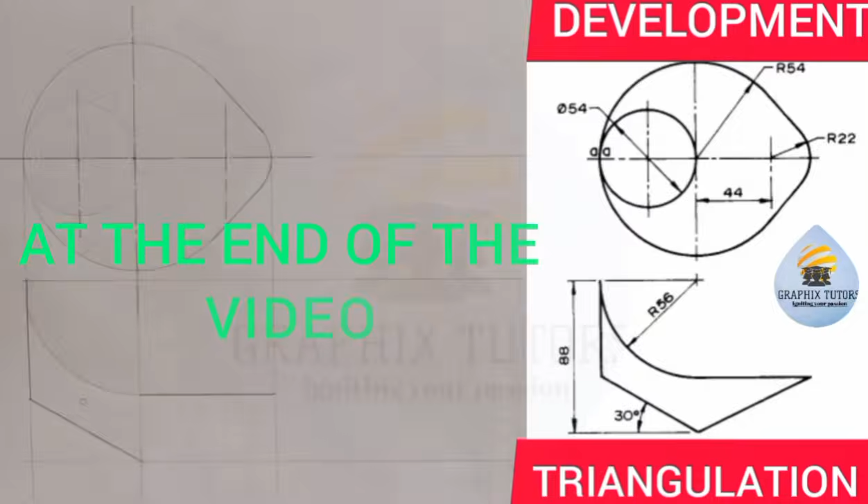Today we want to solve another problem involving triangulation where we are told to develop or construct the full size pattern for the scoop with seam on AA. If you look at the diagram closely, we are told to develop it, to draw the development of this given figure. The first thing you have to do is reproduce the figure in order to be able to develop it.

The first thing I will do is draw my horizontal and vertical line in this manner. I'll draw my horizontal line, a long one this way, just a faint line first, then a vertical one this way, and bring it down this way. This point where they meet is the center of the given figure.

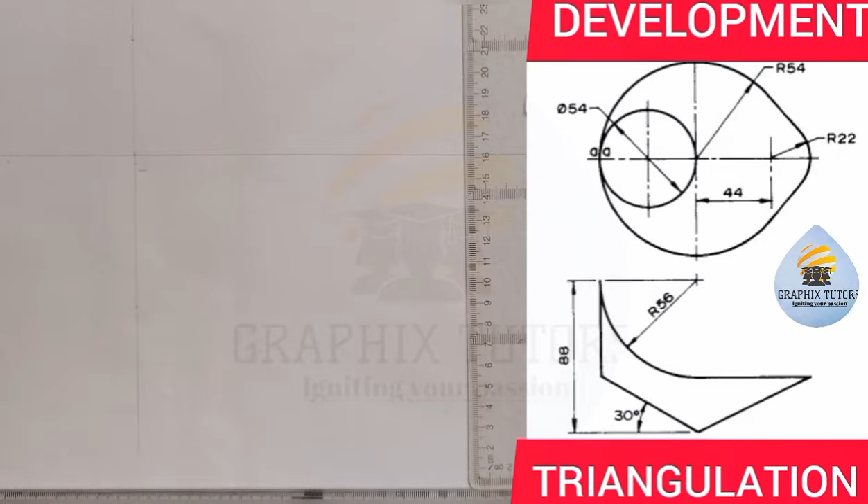Now we are told that this bigger circle here has a radius of 54. So I'm going to measure 54 on my meter rule on that line. This is 54 here, and I'll place it at this point, meaning from this point is 54. Now I'm going to take my compass, place it at this point to this point, which is 54, and draw a circle, a faint line first.

I'll draw a circle, a faint line first. I hope you can see the circle. Let me make it more visible.

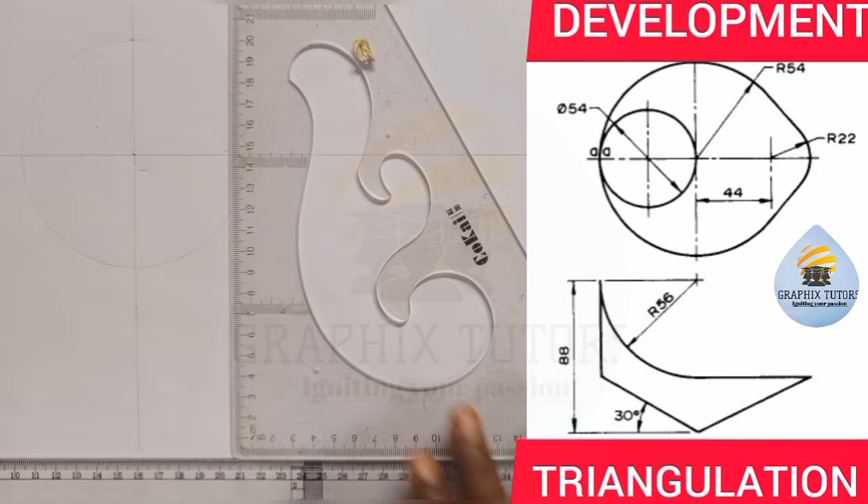Now the next thing I'm going to do is measure another circle away from the center of this figure. From here, I'll measure 44. So if I measure 44 from this point, from 0 to 44, that will be another circle because the circle is not concentric, it is eccentric. That means at this point here, there's another circle. Let me use my faint line first.

It's not taken yet, and we're given the radius of that circle to be 22. I'm going to take my compass and measure 22 here, and place it at this point where they meet, and draw another circle this way. You can see that I've drawn another circle here.

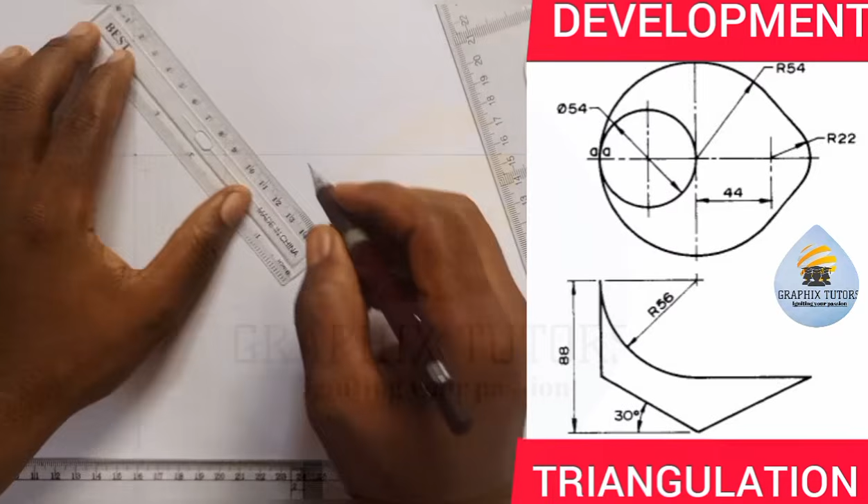Now we're told that these two circles are tangential to each other with a straight line. So I can use my line and measure a tangential line from this circle to the next circle. It should be tangential, from this point to this point. And I'll come here also and do the same thing, from this point to this point, then take it this way. Tangential.

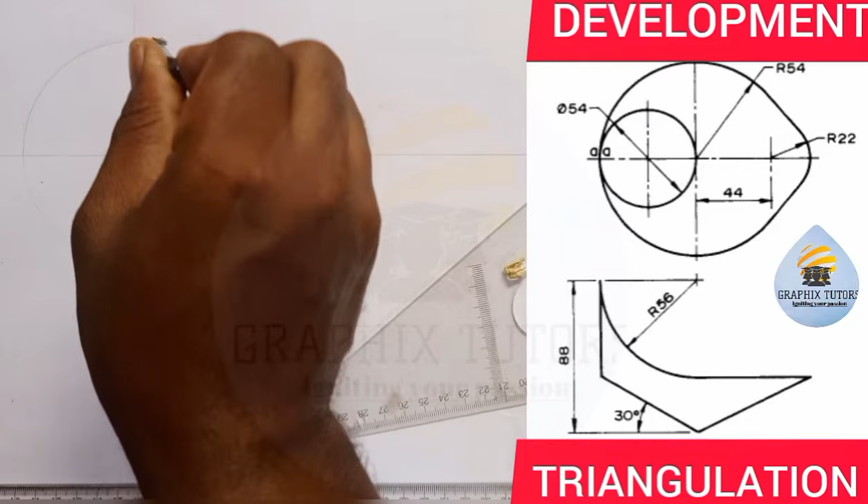Now I can thicken the circles. I will thicken all the circles that I have here in this fashion. So when I place it this way, I'll take it to that point and thicken it. I'll stop here. Then here also. I'll place it at the center point also in order to complete this one.

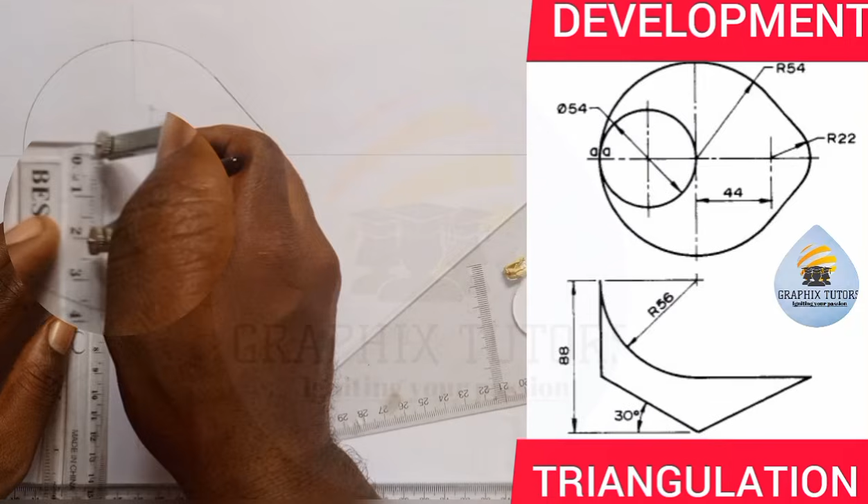Now the next one is there's another circle here that has its own center. The radius is given as half of 54, which is 27. So I'm going to measure 27 here, from 0 to 27. This is 27 here. Then I'll come here and move it to that point, ensuring that it is tangential to the two circles here. You have to ensure that it's tangential.

This is what we have here. So the three circles, they are eccentric. So we use this circle to have this arc.

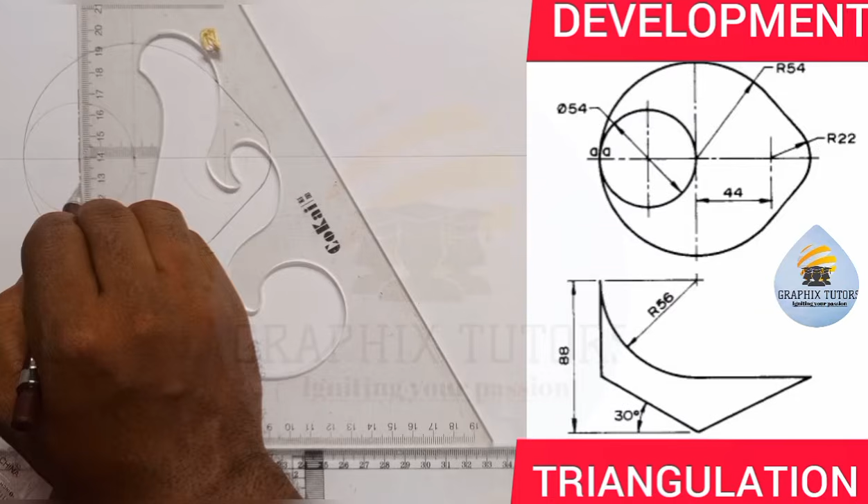So I'll just draw my vertical line here. At this point is the center line here, long, short, long, short, and so on. Towards this line here is another center line, long, short, long, short, and so forth. Then here I can place another center, because this is long, short, long, short, and so on. And at this point another center here, long, short, long, short. So this is the three centers that we have here, eccentric, not concentric.

So now, the next thing we'll do after we've drawn this out, since this is the plan, is to get the elevation. And for me to get the elevation, I will just project this end line here downward.

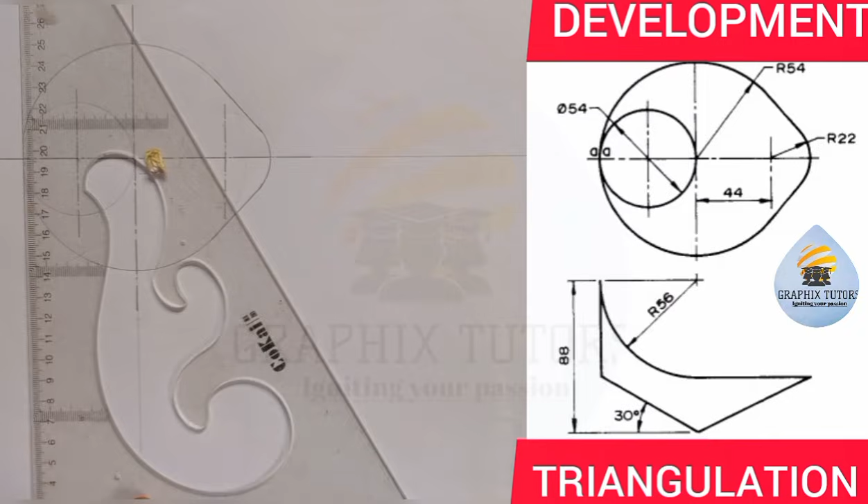I'll project it downward this way. You can see that, and I'll pick a point. Let's say this point here. This should not touch the figure. I'll just project it this way.

Now we're told that from here to the base, which you can see from here to here, is 88. So I'm going to measure 88 from 0 to here, this is 88. And I'm going to draw another horizontal line there, this way.

Now the next thing I'm going to do is, at this center point here that we have, which I have drawn earlier, this center line here, I'm going to draw a line at an angle of 30 degrees. And my set square is on my t square in this manner.

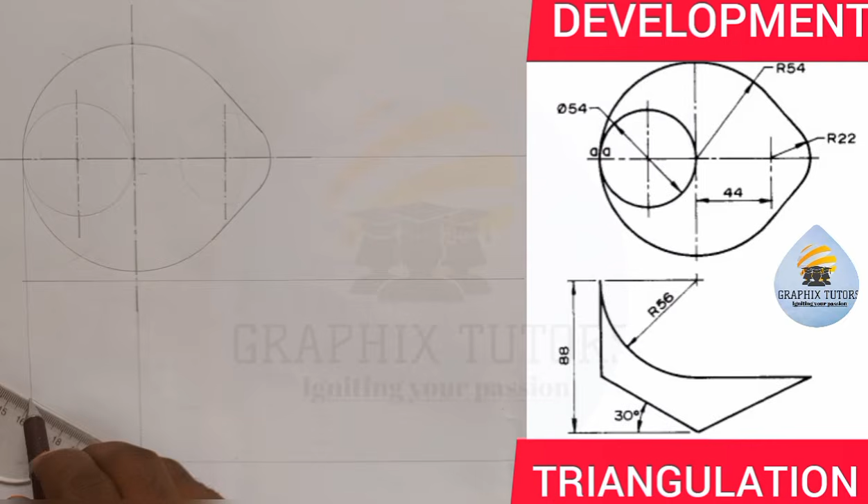Once I move it to this point here, I'm going to draw a line, and that line will get an angle of 30 degrees to touch here. So what I'll do, I'll thicken it, from here to this point. And the other one will be coming up here to touch this.

Now the next thing is, from this point here, I'll measure a radius of 56, as you can see there. From 0 to 56 here. I'll place it at the center point here, and I'll have this, radius of 56.

On this point here. So taking. You can see that, so I'm going to thicken it just this way. I'll move from this point, and I'm going to take a radius of 56.

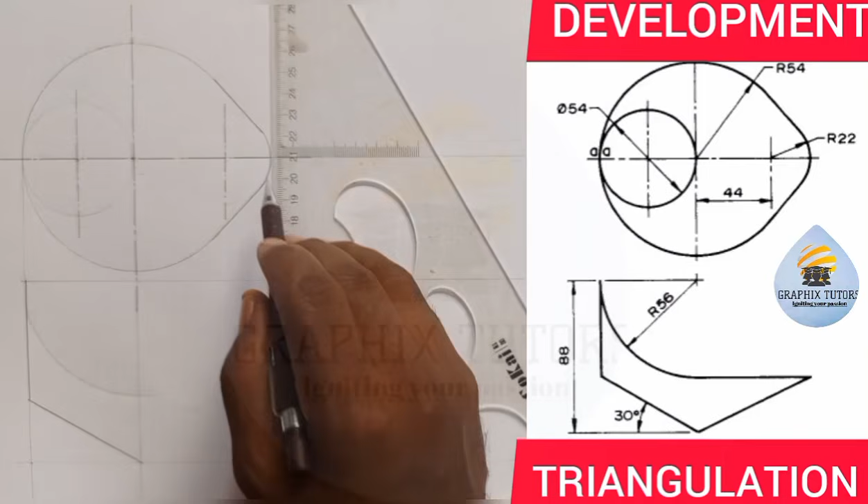And what I'm going to do is, from here to be touching this last point here, I'll draw a line from this point downward this way, and I'm going to draw this to touch that point. So once you've done that, now take this to touch this point here. So this is what we have here.

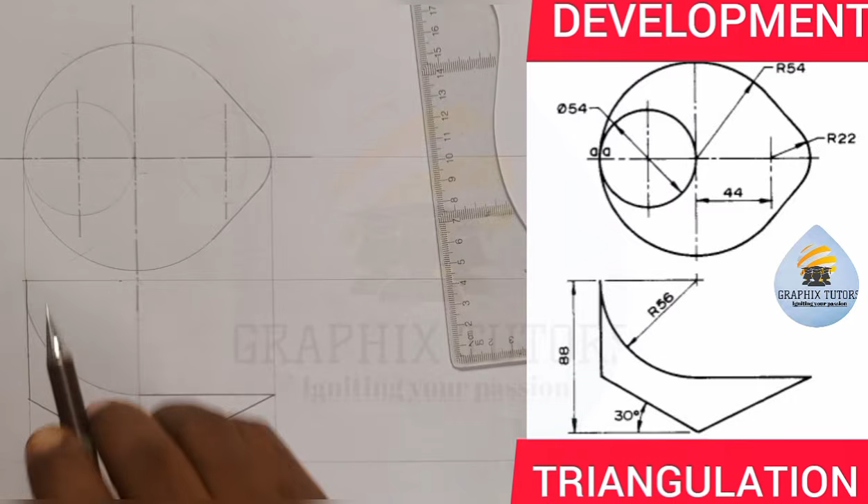Now the next thing is for us to develop this given figure. So before we can develop it, we need to divide, since this is a circle on its own, we divide the circle into 12 equal parts.

First of all, let us start from here. So this is my point A, which I'll give as my point 6. That'll be my point 6 here, at this point. And I'll divide this circle into 12.

How will I do that? Just take your compass, place it here, and mark up this level. Come here also, mark up here. Come at the center point here, mark left and right. So you now take your meter rule. No need of moving the point to reduce the number of lines I will have here.

So from here, I'll mark here. From here, concentrate the center, I'll mark here. I don't want to draw lines to reduce the amount of lines I have there. From here also, I'm going to mark here. So what I'll do is this will now be 0, here will be 1, here will be 1, here will be 2, here will be 2, here will be 3, here will be 3, this is 4, this is 4, this here is 5, and here also is...

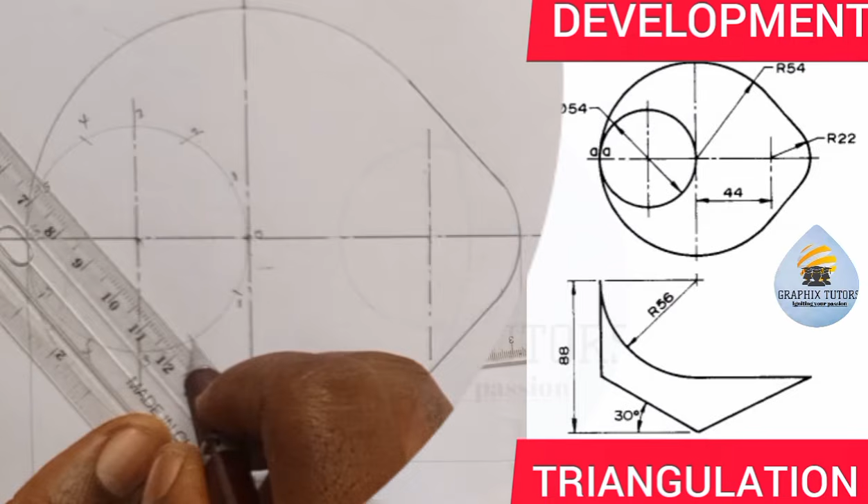Let me do that too. If that is 5, then this point to this point here, here also is 5. So this is what we have here. I've divided that line. You can choose to draw your line if you want to, but it's not necessary. I can just come here and draw my line to come to this point.

Draw the line from here to pass through here to come to this point. Then you do this too, which is not really necessary. So you divide it into 12.

Now the next thing you do is this circle here too, you divide it into 12, but I'll focus on one other side here. I only divide because this is where it starts being tangential from this point here. So I'm going to divide here into 12 too.

So when I take my compass, I'll place it in this manner, and I'm going to mark from here, up and down. I'll come at this top here, I'll mark up. I'll come here also, I'll mark here. Now once I've done that, I'm not going to divide each of this further again.

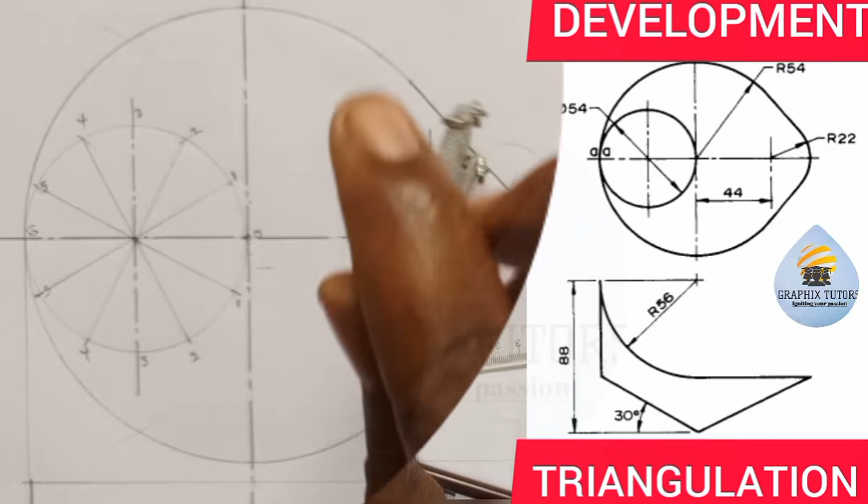So bisect here, come here, and also bisect here. So where they meet, I will now move it to this center point here. From this point, touch here, and from this point, touch here.

I'll come here also, I'll do the same thing. So since I have from here to here, look at the logic. From here to here, same thing as saying from here to here. Similarly, this is what we have here. So I'll come here too.

From this point, you can easily bisect it if you want to. Here, that is here, come here also, you bisect here. So where they meet, in that center, I can just take it here. So I can call this center point to be P, and here to be N, and here to be M.

So again, similarly, here will be what? N, and here will be what? M. So this is what we have here. So I'm only focusing on this three here. So that is what we have here.

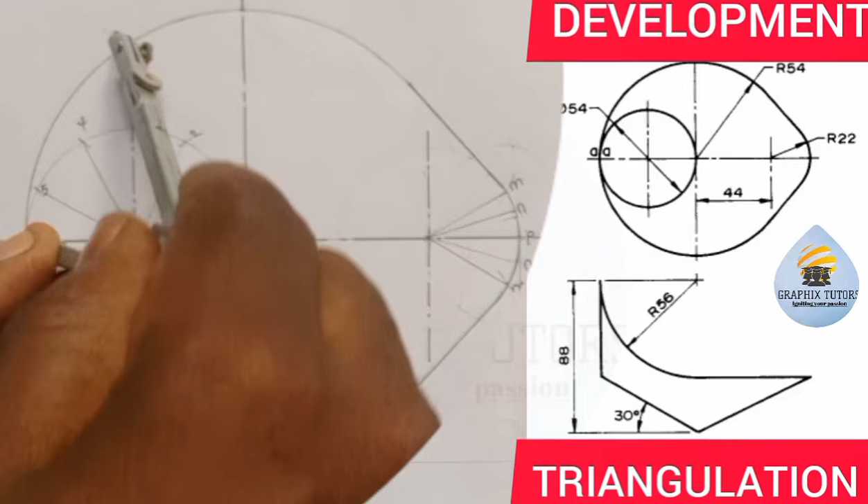So if I take my compass and I place it from this center point to this point here, you can see that. I will come here, I'll cut up. I'll come here, I'll cut left and right. Then I'll come here, I'll cut here.

So what you do is you just pick the two points here and you bisect it in this manner. From here to here, so I'll strike an arc. I'll place it here also, I'll strike another arc. So where it meets, I'll draw a line towards the center, but I will not draw the line to avoid too much of lines on my diagram here. So I'll just stop here.

So what I'll do is I'll take my compass too. Instead of repeating the same thing, I'll start measuring them. So from here to here, it's the same thing as saying here to here. Same thing as saying from here to here.

So instead of you dividing everything, you can divide all you know here. So here will be my point A, my point B, my point C, point D. Here will be what? Point E.

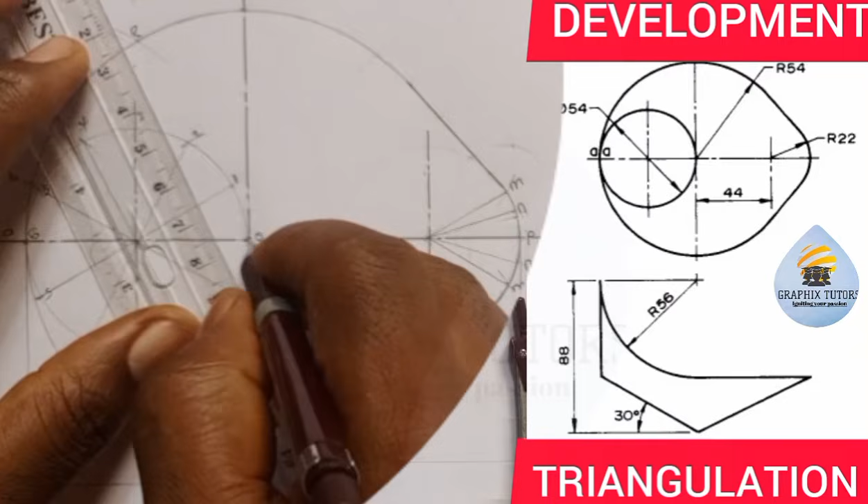You can try to bisect it again, these two points here, to get the center from here to here, to get F. So from this point, this will be my point F.

I can come again from here to here, which is the same thing, this F and B. So to this point here will be G, and we have the next one which is already here. So E, F, G, H.

And after the GH there, or I can put it this way and say, before that I need to bisect here too. Does the same thing, or you don't have to bisect, just transfer the point from this point to the next point here. Or you just bisect, since this point from here to here, I had this, bisecting these two lines here. Let's see.

Let's move it from this point. From here to here, this is G, H, the next one, and the next one. So if this is G, H, here will be what? J, and here will be what? K. All together, G, H, J, and K.

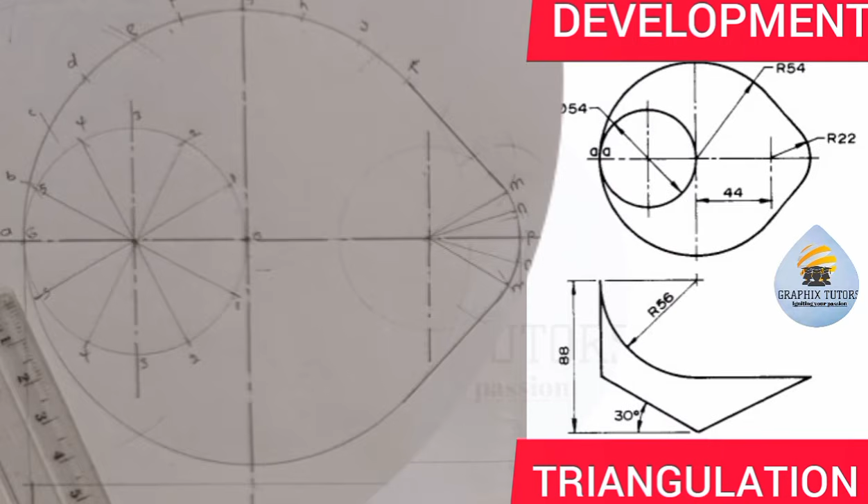So what I have to do here, here is M. So I'll do the same thing because it's symmetrical. Whatever you see at the top will be the same thing at the bottom here. So I'm going to do the same thing here. So I don't have to stress myself, I just have to transfer my points.

So with this, to get the next E from here, this is another E here. Then the F from here, this is another F here. Then this is G here. And we have from here to here, to the center of the circle, to the center we have H here.

We have our J again here, this is J here. And we have what is called K here, this is K here. Are we good?

Then we can continue and just transfer the points continuously from here to here, this point to this point. Same thing as saying this point to this point, then here to here. We already have this here. Or better still, from A to B, to give us to this point here. So this point here, seen here, is also B.

That again, then we continue. The next point we have C here. Then this is D, this is E, F, G, H, and what? J.

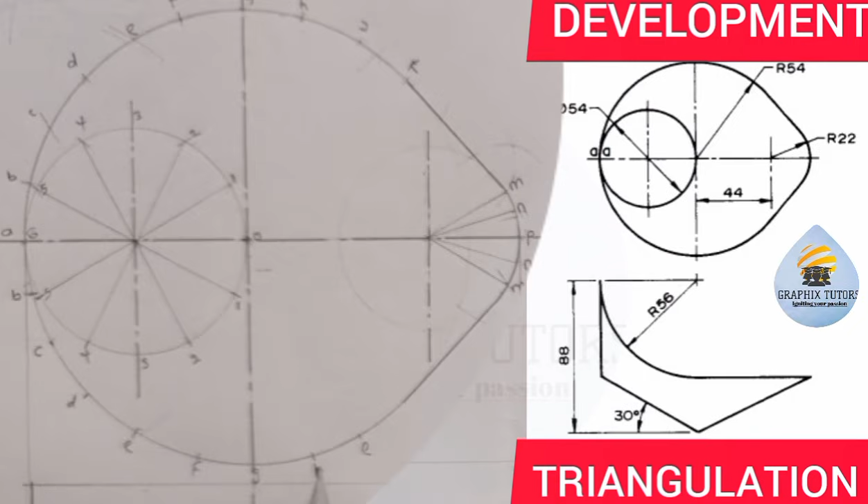This is G we have here. That's the J, then we have the K. You can even transfer the point through this manner. This is K here, right? I can just come here. This is what? This is K also. Right? Can transfer it to this manner too.

This is F to F here. This is E to E. This is D to D. And this is what? C to C, then B to B. You can just transfer the point using your set square.

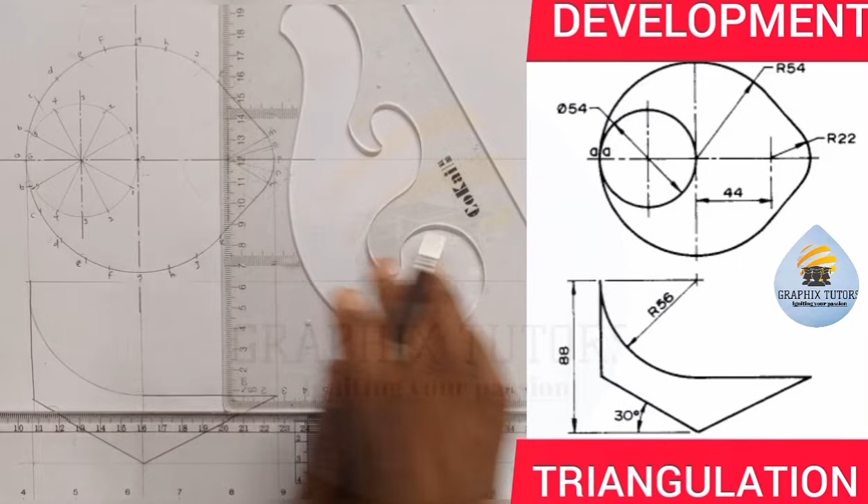That's what we have, right? You see what I did? Instead of wasting your time, you just use your set square, pressing your T square, and you move to K. So K and K on the same point. J and J on the same point. H and H on the same point. G, F, and so on and so forth.

You mark this point. Now what you do next is everything should be rotated to this center here. So I can easily clean all this point out of here. I use this to get M and N, so I should just delete all this off. And this is what I'm doing here.

Now, what I want to do is take everything towards the center of the main circle. So I'll take M to this center here. I'll take N to this center here. P is already there, then N also to this center here. Then this also to the center here. Right? This is what we have there. And we'll continue doing the rest.

Now the king, K, will be holding 1 and 2. K will be holding these two, right? Both up and down, the same thing, because it's symmetrical. K will be holding here to here. 0 and 1, they're symmetrical.

You can see that. So K will be holding 0 and 1 this way. You can see that. Then the next thing here will be J will be holding 1 also. So J will be holding 1. And 1 is holding J, H, and what? 1 is holding K, J, H, and G.

So let's join this way. 1 is holding K, J, H, and G. That is, 1 is connected to those points. You can see that. So 1 is holding K, J, H, and what? And G, the same thing too.

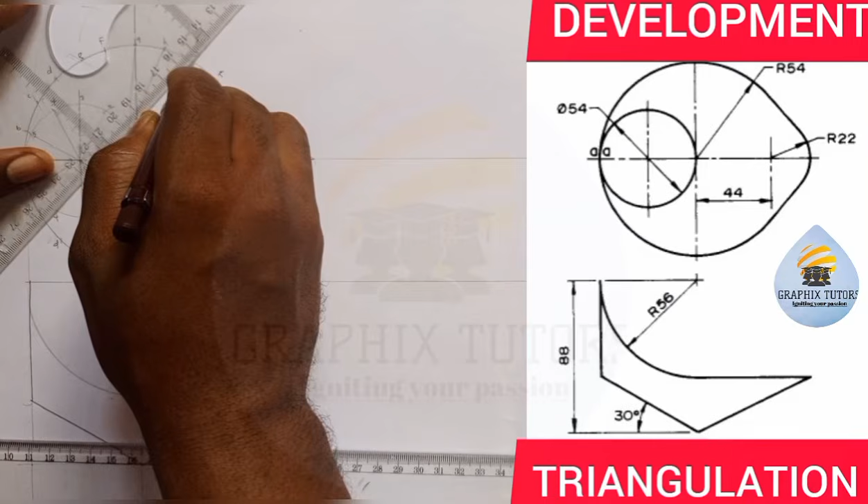This point 1 is holding G, holding H, holding J, and holding also what? K. Just like this, what we have here, right? So from here, point 2 is holding also G and F, G and F.

Then point 3 is holding E and A. Point 3 is holding F, E, and D. That's point 3. So holding F, E, and D. Then point 4 is holding D and C, D and C, right?

Then point 5 is holding C and B. Point 5 is holding this point C and also point B. Then point 6 is holding B and A, right? Point 6 is holding B and A. So you do the same thing that you did up here, right?

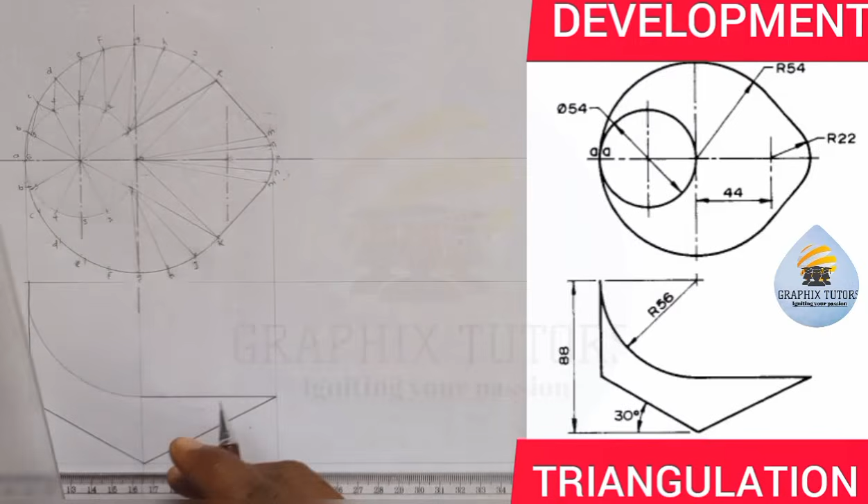So we know that point 2 is holding G and what? And F. Then point 3 is holding E, F, G. Just the same thing you did up there. E, F, and what? D. Then point 4 is holding D and C. D and C. When I mean holding, I mean connecting.

Right? Then point 5 is holding, is connected to what? C and B. C and B. So 6 is just B.

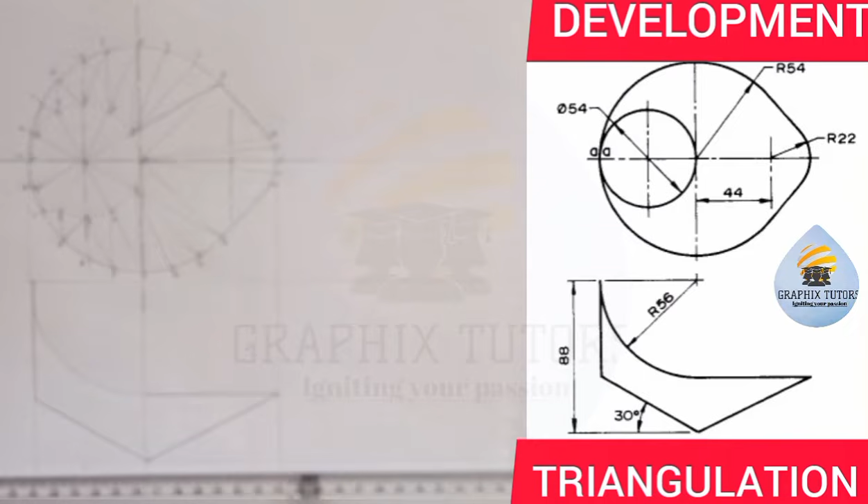So this is what we have here. Is that okay? So all these points, I will move them straight down to touch what we have here. So move all these points here from P, this point P here, then N, so this is N coming down, then M is coming down, then K is coming down, J is coming down, H is coming down.

G is down, F down, E down, D also, C here, B here, then we have the A here, right? This is what we have here, so I'll just write it this way: A, point B, C, D, E, F, G, H, J, K, M, N, then P.

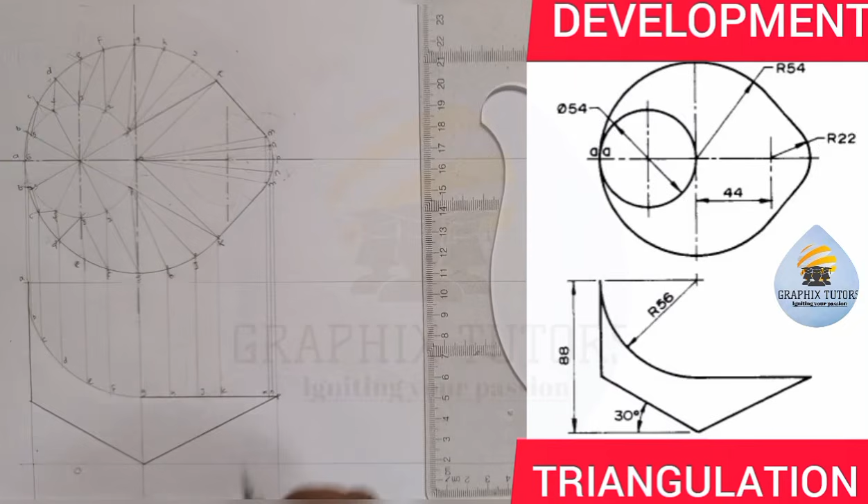Is that okay? So this is what we have. I'll just join everything together. So we're going to join everything together. How am I doing that?

From this point here, this point 0, so here will be 0. From the inner point here, here is 1, right? So I'll just say point 1.

I don't want the lines to be too much. This is how I got my 1. The next one is 2. This is how I got my 2.

Then to 3, this is point 3. I'm tracing the line. Then to 4, this is point 4. Then to 5, right? This is point 5. And we have 6. So here is 0, 1, 2, 3, 4, 5, and what? 6. This is all we have.

So what do you notice? Let's start from M. MNP is connected to what? 0. So I'm going to take MNP to 0. So this is point 0 here.

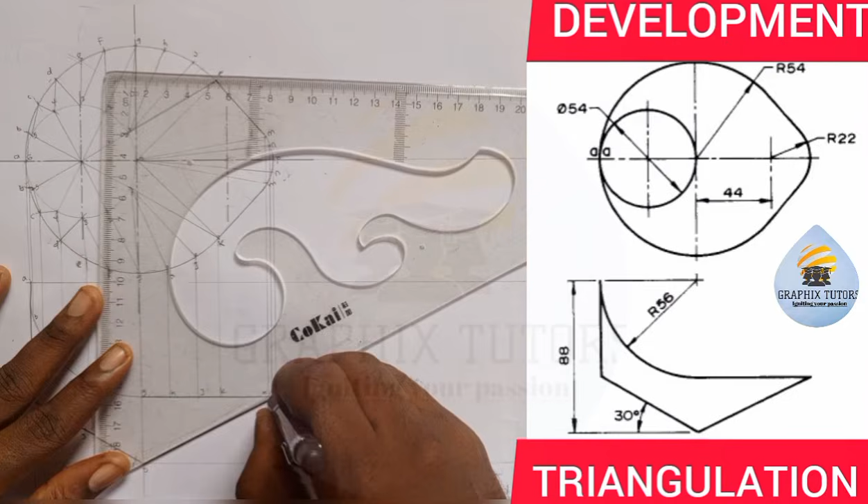Then the next one 2. Then the next one we have K. K is connected to what? To 0 and 1. So K is connected to 0 and 1.

Then 1 is connected to what? 1 is connected to K, J, H, and G. Right? 1 is connected to what? K, J, H, and G.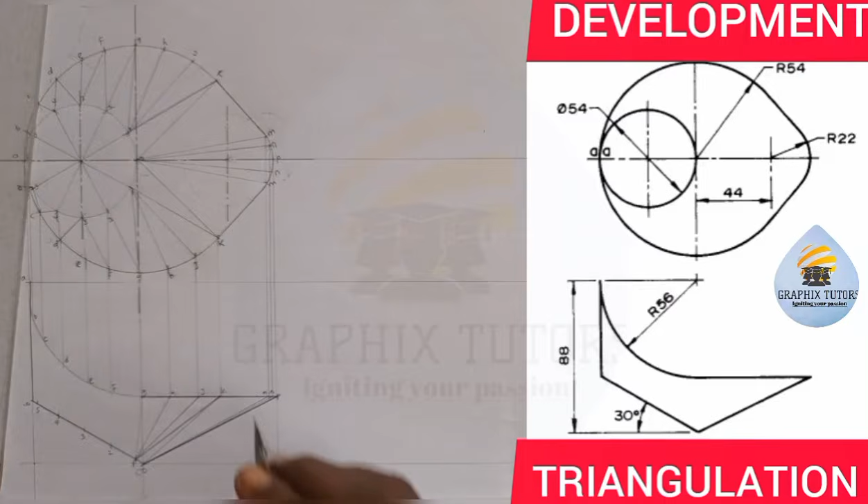Is that again? Then the next one is 2 is connected to G and F. 2 is connected to G and F.

Then 3 is connected to what? F, E, and D. 3 is connected to what? F, E, and what? And D.

Then 4 is connected to D and C. 4 is connected to D and what? And C. Then 5 connected to B and C. 5 is connected to what? B and C.

Right? Then we know 6 connected to what? Just B and A. So this 6 can be at the point of B and A. This is what we have here.

Is that taken? Then the next thing we ought to be doing here is I'll draw a vertical line, because all these lines are inclined, they are at an angle, they are not straight. So to get the true length of these lines here, we get them from the elevation. So to get this true length, I'm going to draw my vertical line this way.

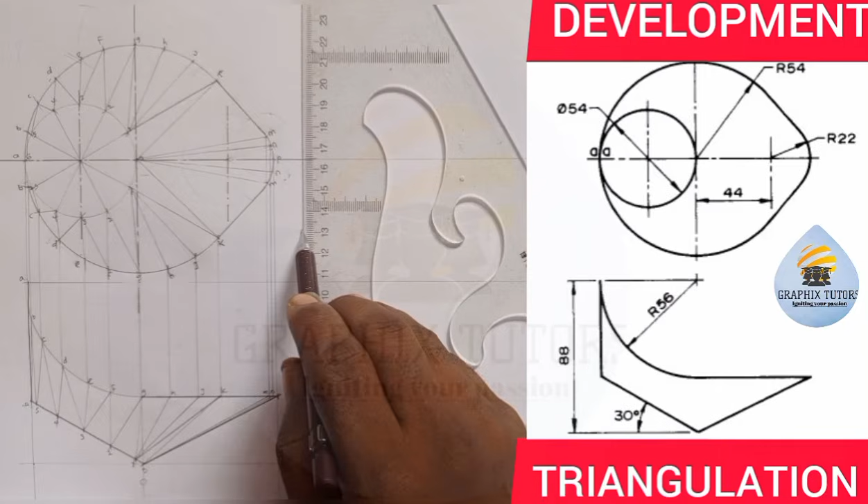Right? So this is my reference point. I'll just put reference point R at this point here. Is that taken? So what I'm going to do is, you see the way I'll start with it now. So this is reference point R. I'm getting my true length there.

Are you ready? So we're going to start from this point here. Don't forget that the line is symmetrical when I divide but horizontally when I cut here. What is at the top is equals to what is at the bottom here in terms of the plan here. So we'll start. Start again.

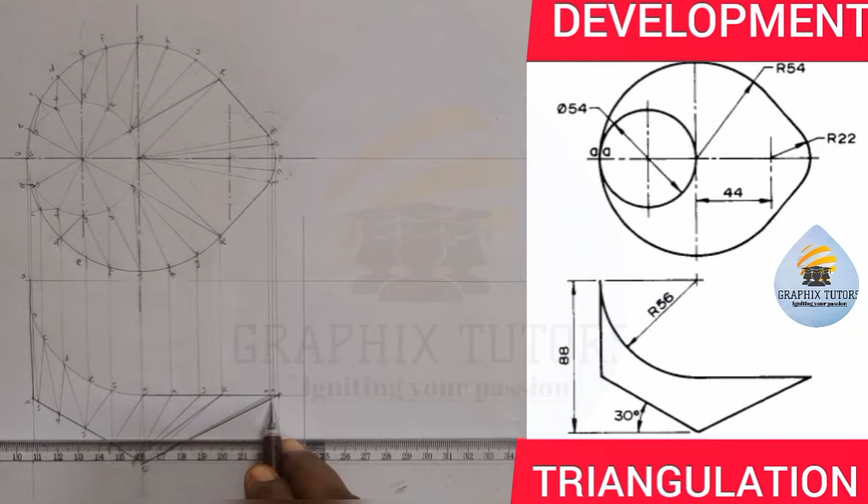So we are going to start. I'm going to generate every point I have here. Right? Point P, you see this line you see here? We know that G, H, J, K, M, N, P, they are on the same line here. They're the owner of this line. Right? Then this is for F.

For point F. This for E. This for D. This for C. This for B. And this is for A that we have here.

Right? So all the M and F, they're all on the same line, and these are the reference points where I'll take my measurement from. So we'll start. Since we have successfully done this, it's for us to start developing.

Now I'm going to draw a line, a straight line, or pick a point. Which this point I'm picking here should be my point 6. Starting from 6, because at AA here, as in the section diagram, that is where we cut it open to spread it out. So at 6 here, right, that's my point 6, and I want to get my point A.

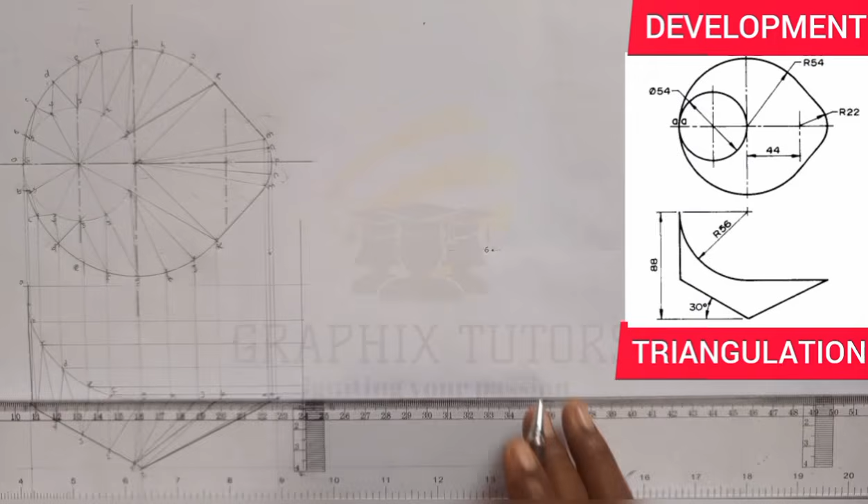We know very well that the true length from 6 to A here, this is where it's starting to become tangential. I will not take it up here, I'll just take it to this point where it starts being tangential here, and I'm going to place it here, right?

So I'm going to strike an arc here, A. Anywhere here, that is where A will fall in, right? That is 6 to A. So how will I get my point A? First of all, I need to get my 6 to B also, because 6 is connected to A and B. So for me to get 6 to B, I'm going to take from 6 to B here.

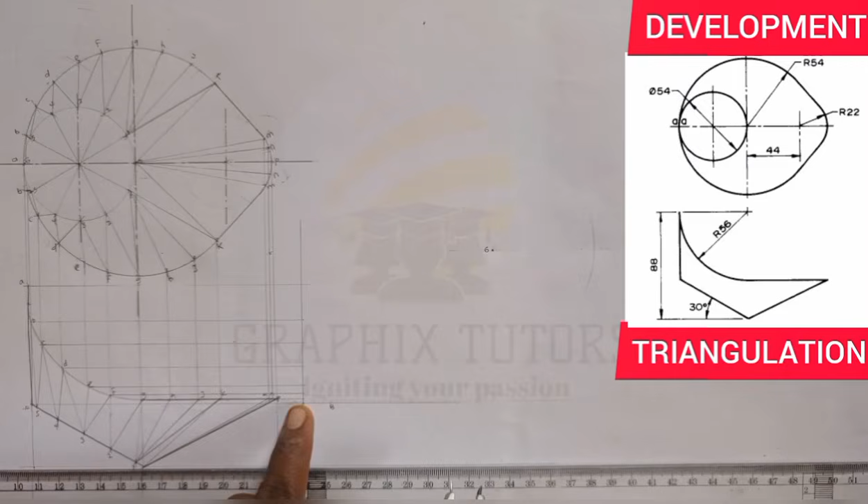You can see that, from 6 to B here. I'll come to this line where I'll extend 6 to this point. From that point, I'll mark my B. So from B to 6, this is B, line of B to 6. I can actually just draw a line here if I want to. Line of B to 6. That's the true length, TL.

True length. I'll just come here and mark from this point here. I'll come to 6, and B will be somewhere around here and here. Now after I've done that, right?

We've not gotten the points A and B. We'll just draw the line of A and the line of B up, and as this is symmetrical, I want to bring them simultaneously, since what is up is the same as what is down. Now the next thing is, how can I get my A now? This is what I'll do.

So don't forget, I can take any given line. This line here is my line A. So at any given distance, at any line, I'll just draw it from 6 to this point here. That'll give me my A.

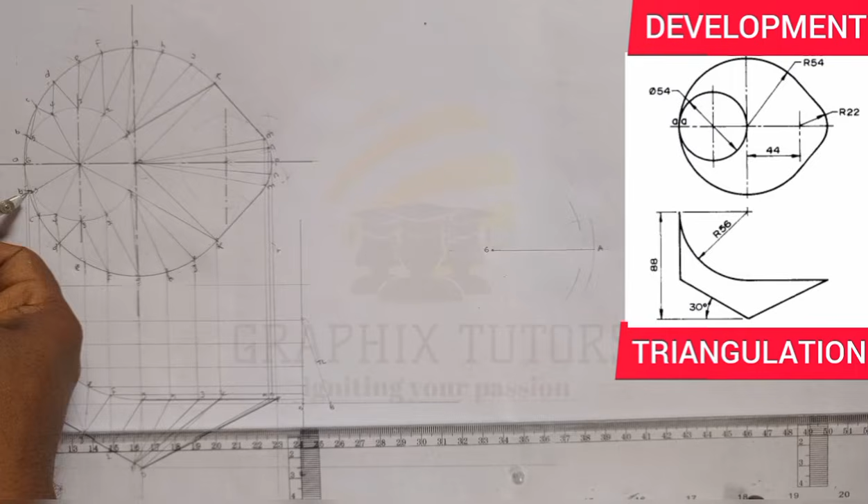Now to get my B, you know that A to B from here, up and down. So I'll come from here, A, I'll strike an arc. This will be B here, and this will be B here.

So this point where it meets here is my point B, and this point where it meets here is also my point B. So I'm going to join those three lines together with my rule. Since 6 is connected to B, 6 is connected to A, and 6 is connected to B also, they are symmetrical, to save our time.

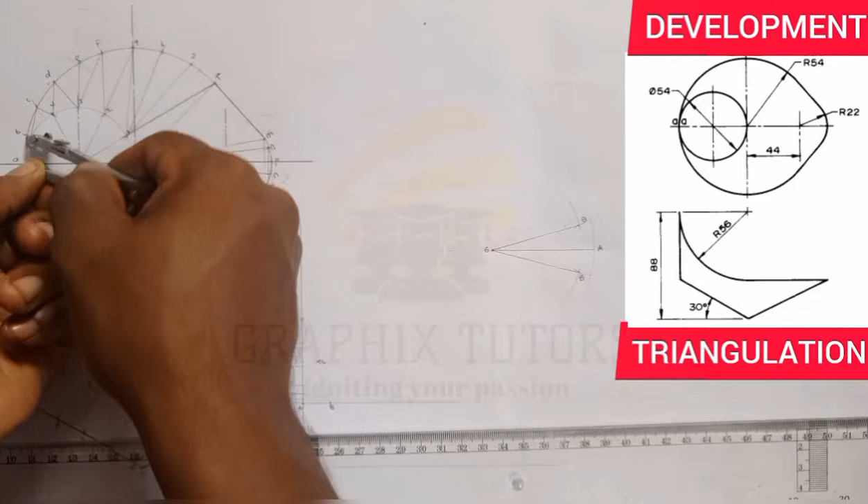Now the next thing is, we've done for 6. 6 is connected to B, and 6 is connected to B and A. The next one will be 5. So I'll come from 6 to 5, and if I place that point at 6, I'll strike an arc here, up and down.

Then from B to 5, B is also connected to 5. So what I will do is go up from here to B, you can see that. So I'll come to the line of 5, and this is the line of 5 here. I'll just draw it out straight, the line of 5.

So this is where the line of 5 is meeting here. I can just extend the line of 5 out. This is the line of 5, the one under here. So we know that from this point to this point is B to 5.

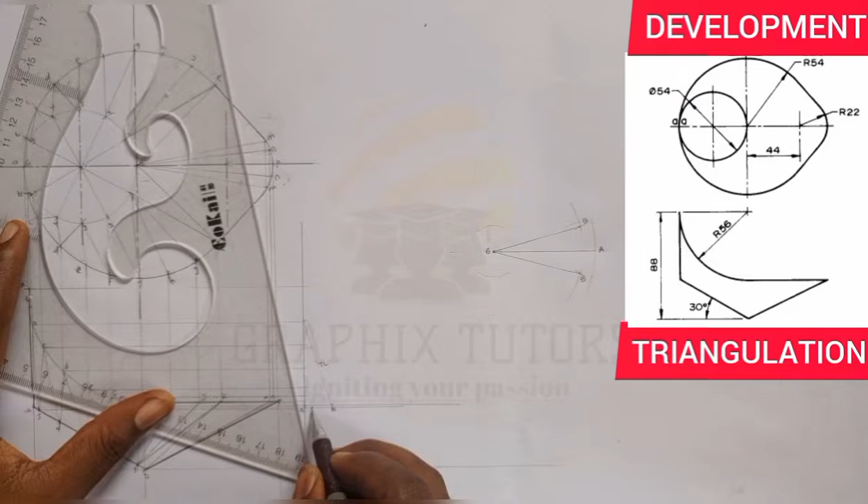That will be the true length. I'll come to the point of B here, or 5 here, and strike an arc this way. So where it meets here, that will be the line of 5. So I'll just draw the true length from this point to the line of 5, to the line of B. From here, I'll take it up if I want to.

So this is for 5. I'll just come here, take the true length from 5, the line of 5, to B. I hope you understand that. Then I'll come to here, from B, I'll strike an arc to cut here, and I'll strike another arc to cut here.

So that point where it cuts up and down will be my point 5. If I come here, B cuts here, I'll come here also, B also cuts here. So here's my point 5, up and down. So go to the next.

5 connected to B in this manner. 5 is connected to B, and also 5 is connected to B here. Now we'll proceed. So the next one is 5 is also connected to point C, right?

5 connected to point C. What I will do is move from B to C, and strike an arc this way up, and come here also and do the same thing down. And 5 to C. This is 5, 5 to C.

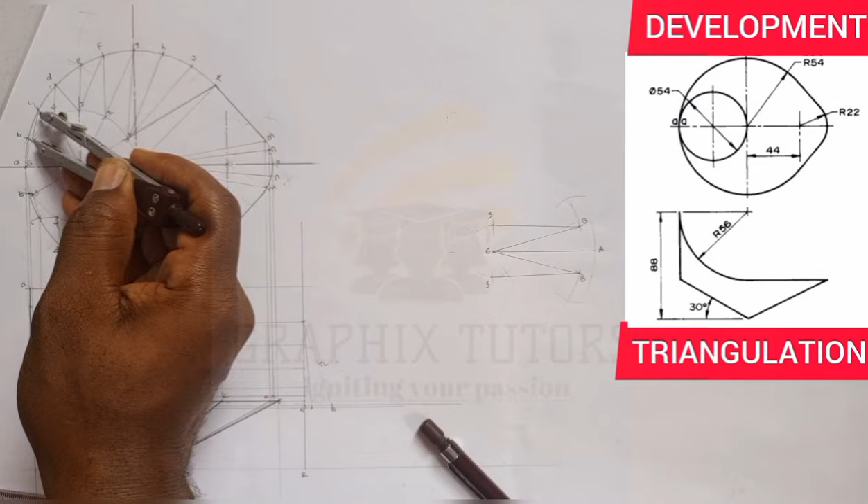I will come on the line of 5 here. I'm going to mark. This line I'm marking here will be for the line of C. So that means from here, this is 5 to C, 5C. So I can just draw a line if I want to, from here to 5 to C, because this is the line of C, and this is the line of 5.

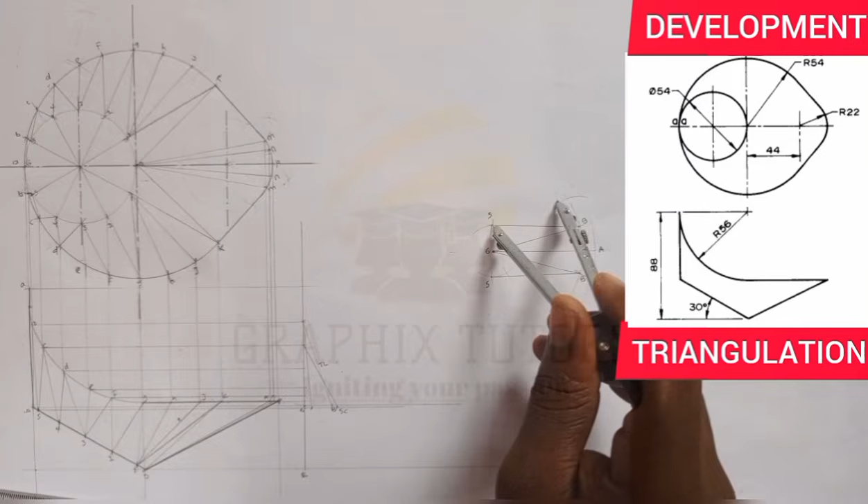So 5 to C, I'll place it at the 5 here. I'm going to strike an arc here, and I'll strike another arc here also.

So this point you're seeing here will be my point C, and here also will be my point C. Let me remove this to avoid distraction. I was using faint lines to join them so you understand what we're actually heading to - this to this, this to this, and to this. I'll connect them sooner. So this C, 5 to C, 5 to C.

So the next one, if 5 is connected to B and C, right? Then the next one is C connected to point 4. So to get point 4, from 5 to 4, I'll place it at 5 and strike an arc up here, place it at 5, strike an arc here this way. So C to 4, to get point 4 you need C. So from C to 4, this is how it is.

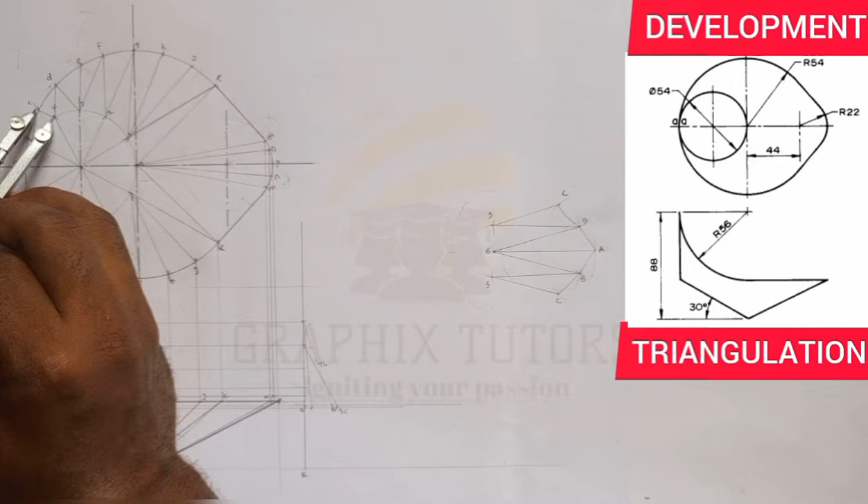Can you see that? Then I'll come to the line of 4. I'm going to use the C to 4 here. I'll draw it out to touch this reference line. You can even extend it out. So I'll take that 4 and mark it. This is C here - this is 4C, C to 4, 4C. So I'll connect it to the point of C.

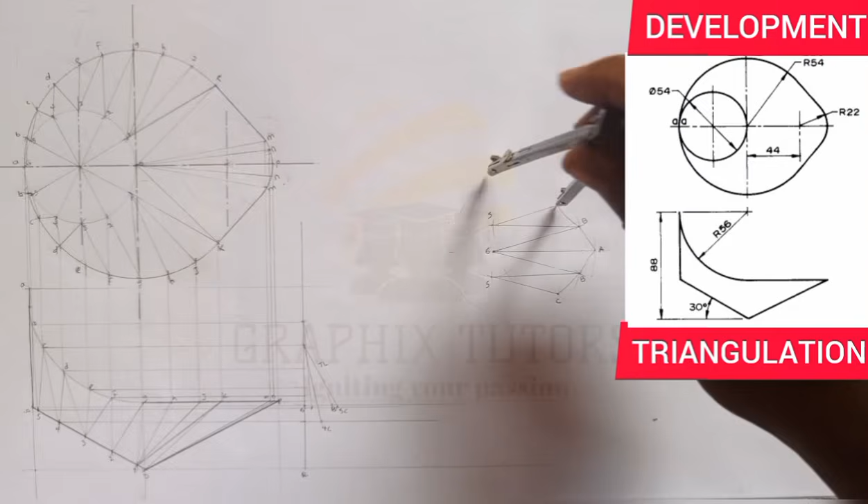So that is the true length. I'll move this from here to the C point here, from here to the C point here. And I'll come from C in order to get my point 4 - I'll strike an arc here. Come to C also to get my point 4, strike another arc here. So this point here is my point 4, and here also is another point 4. I'll continue.

The next one is connecting them that way. C to 4, C to 4. Now we'll move forward. Now the same 4 is connected to D, right? The same 4 is connected to D. So we'll move from C to D.

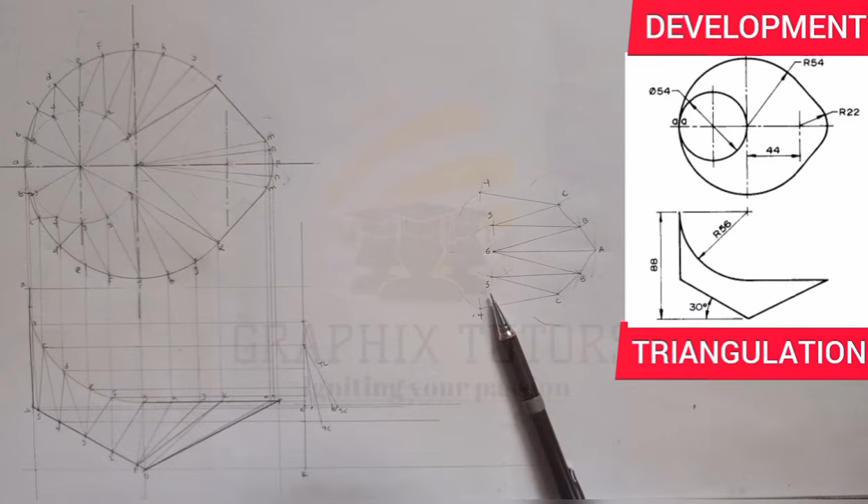C to D, the C to D, any of them you want to use. I'll place it at C and strike an arc up and down. So D is somewhere around this point you're seeing. So 4 to D - this is 4 to D, right? Any of them you're taking. 4 to D. So I'll go to the line of 4, place it on that mark and I'll cut. So this line here is my 4D.

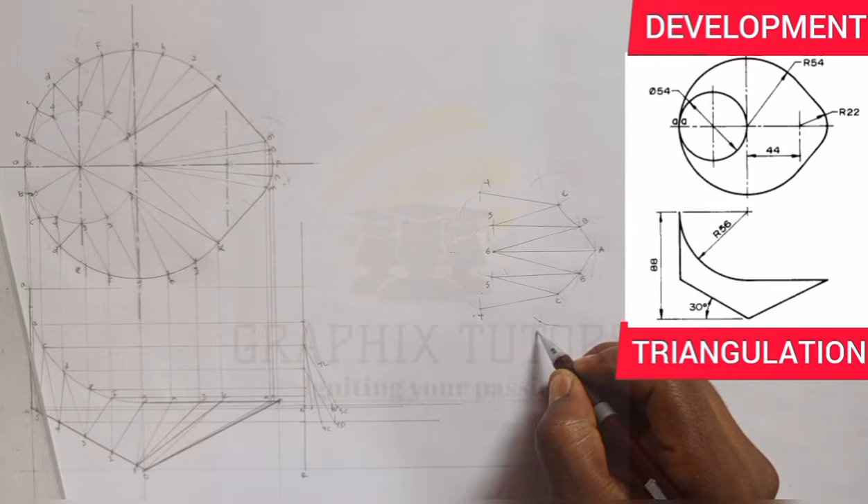So this is D here. I can just join it, 4 to D, from 4 to D. You don't have to really draw these lines, but I'm just showing you. So 4 to D - this is the line of D, then to 4. Can you see that? And I'll come to this point here, 4 to D, from 4 to get point D, from 4 to get point D. So this point you're seeing here is my point D.

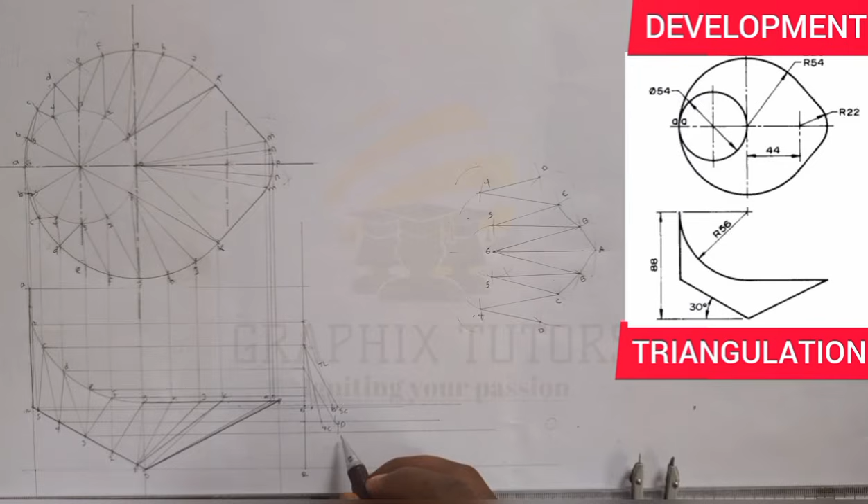D to 3, right? So I'll go to the line of 3 - this is the line of 3. I'll bring it out, straight out. And after I've taken my D to 3, is that again? I'll come to the line of 3, I'm going to mark. So this line you're seeing here will be 3D. I can just draw a line, not really necessary. This is D to 3 here.

So from D to 3, again, I'll come to this D here in order to get 3 here. D here in order to get 3 here. So this line you're seeing here is my point 3, this line you're seeing here is my point 3, right? So I'm going to use 3 to get point E. I'm using the same 3 to get E. So I'm going to come to D to E.

You can see that? And I'll place it here, strike an arc up. I'll come here also, do the same thing here. So I want to get 3E now. So this is from 3 to E.

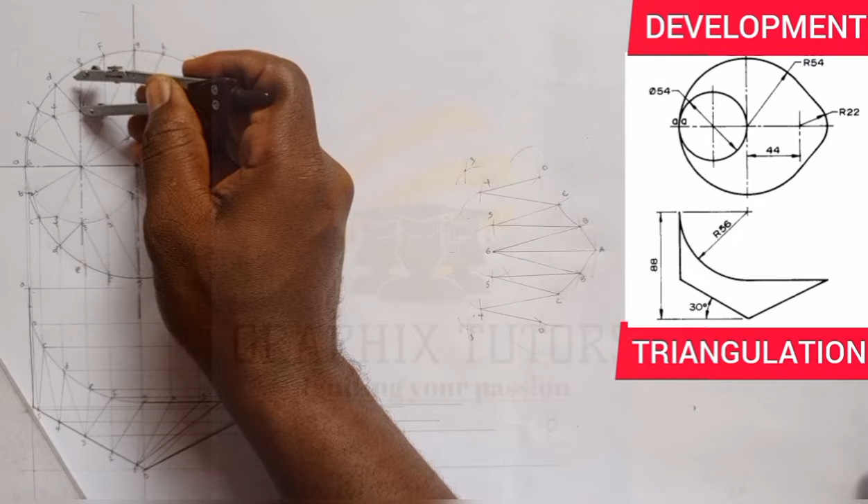I'll come to the line of 3 and strike another arc on that line. This line here is 3E, so I'll draw a line to touch E. This is E, the line of E. 3E. You can see that? So I can take from 3 to E, and I'll come to this point.

I'll strike an arc this way, come to this point, and strike another arc this way. This point here is point E, and this point here is also point E. So 3 to E, 3 to E, and 3 to E.

Don't forget 4 is also connected to D. So we have that, 3 is also connected to D. Right? 3 is connected to D.

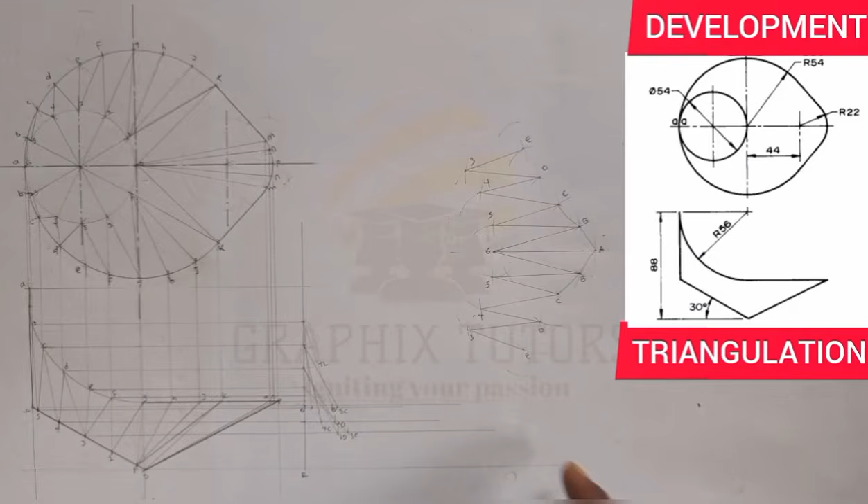Now we'll move forward. The next one is E. We've gotten E at this point, and 3 is also connected to F. So we want to get our point F with point 3, moving from E to F. I'll come from this point E and strike an arc, then come to this point E and strike another arc. For me to get F now, 3 to F.

So I'll come to the line of 3 here, place it on the reference point, and I'll get 3F. From here to the line of F, I can easily connect it and leave it. This is F, so 3 to F here. Is that again? So 3 to F.

Now come from 3, I strike an arc to cut here. I'll come from 3 also and strike another arc to cut here. This point here is my point F, and here also is my point F. So 3 to F is connected together, 3 to F is connected together.

Now the next one is we want to get point G. So F to G, we need point 2. From 3 to 2, because we need 2 to get F, to get G. So 3 to 2, I'll come here and strike an arc, then come here also and strike another arc. So F2, F is connected to 2.

Is that again? So I'll come to the line of 2.

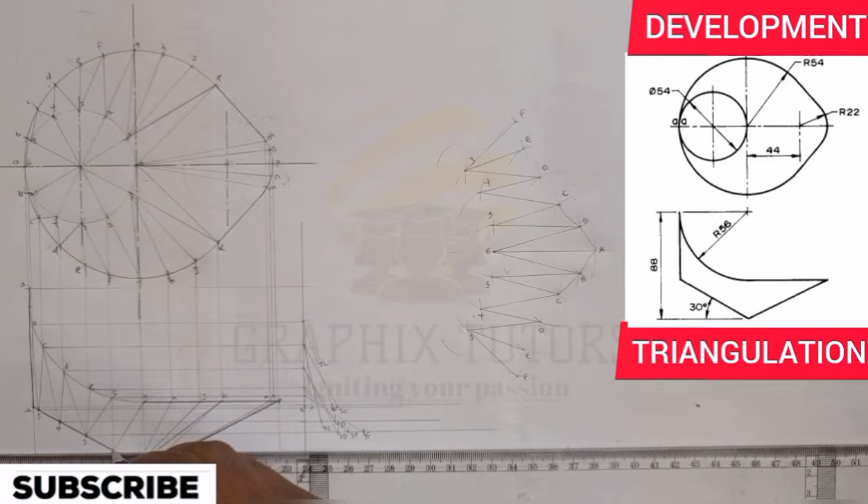Line of 2. I'll strike an arc this way, and that will be my 2F. So this is the line of F here, and I'll draw a line to the line of F if I want. I'll join it from F to this point. So when I place it at this F, I'm going to get point 2. This arc you're seeing here is point 2, and here also is point 2. You can see that.

Now 2 is connected to F, as a faint line. 2 is connected to F.

Now the next thing is the same point 2 is connected to G. We need point G, so F to G here. I'll come here to get G, and I'll come here to get G. You can see that. Then for me to get this, I need 2G.

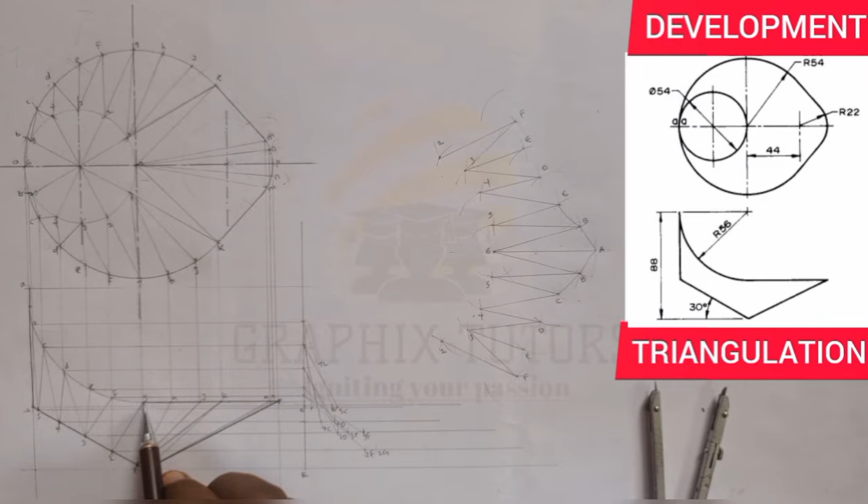So this is 2 to G. I'm going to come here on the line of 2, and mark 2 to G. This is 2G here, so connect the line of 2 to G. This is G here on this same reference point. This line you're seeing here is the line of G.

I'll join it if I want to, not necessary. So from here, G to this point. I'll come here to get G here, and come here to get G here. This point here is my point G, and this point here is also my point G. Now I'll just connect these two lines together as a faint line, 2 to G and 2 to G.

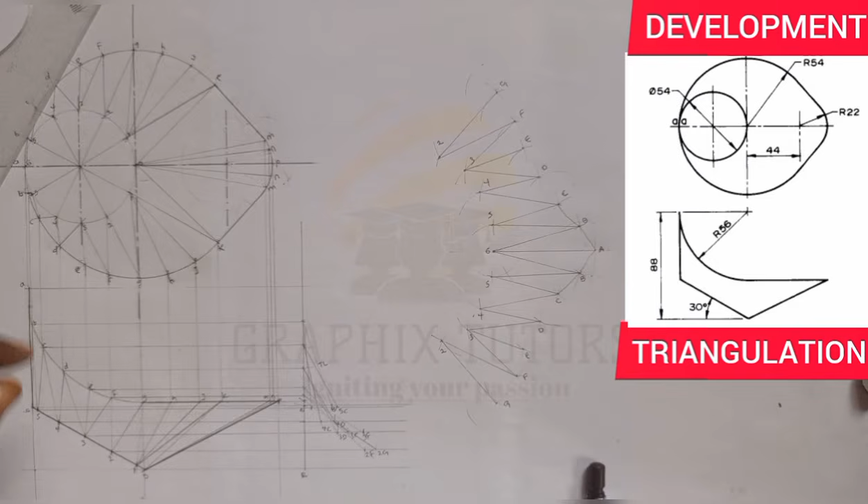Now the next one is to get point H, because we've gotten 2 to G. From G, we're going to get point H, G to H. I'll come from G to H this way, and come here also, G to H this way. Now we know that G to H all together, G to H and 2 to G, is connected. Is that the key?

Also, G to 1 is connected. So I need to get point 1 also first. So from 2 to 1, I'll come here. I'll strike an arc. I'll come here also. I'll strike another arc.

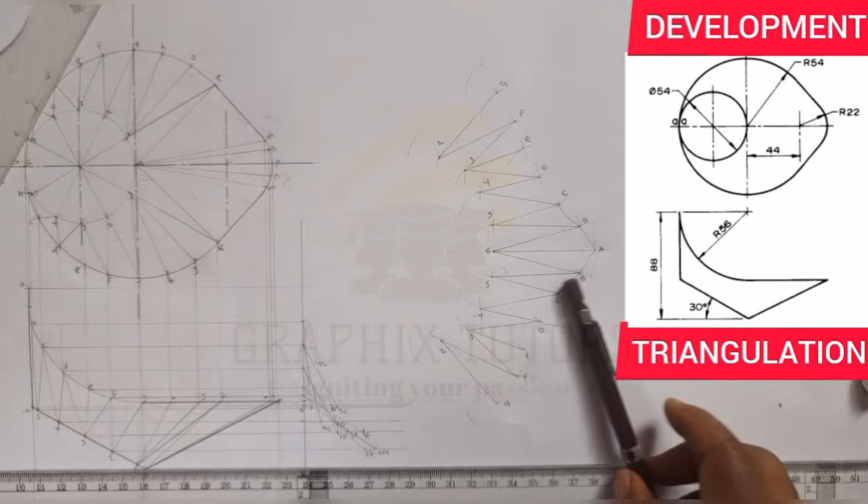So we need G to 1 now. So this is 1 to G. On the line of 1, let me extend this to get my point 1. This is the line of 1, so I'll place it here. So that is what? My 1F there.

Are you with me? On the line of 1, I'm going to get G. So 1 to G. So from here, this is 1G at this point here. So the line of G is also at this point. So I can just join it so I know the direction I'm taking.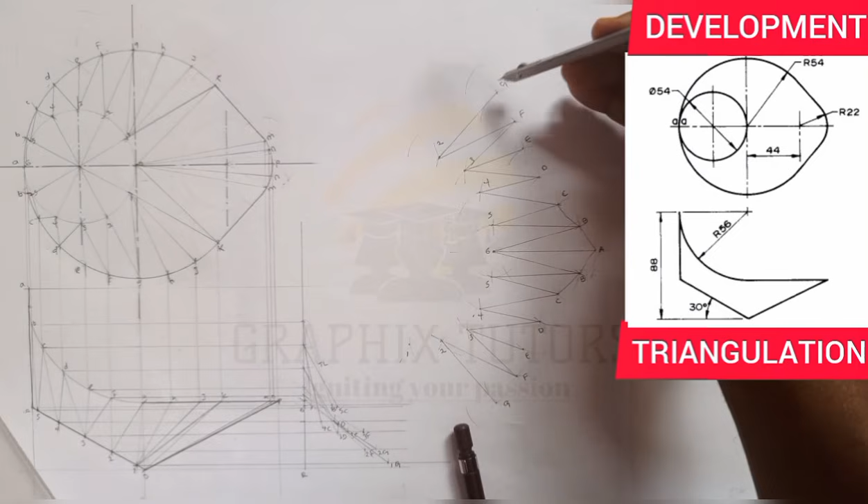1 to this point here, because G is on the same line here. So now I place it here from G to 1. This point you're seeing here is my point 1, and G to 1 also. This point you're seeing here is my point 1, right? So G to 1 is connected.

Then the next one that we're having here is F. Don't forget, I've already drawn my line of F. I measured it earlier. So let me see G to F. That's this way. Or any of them, I mean G to H. So you see that from here to H is already there. And from here, G to H is here also.

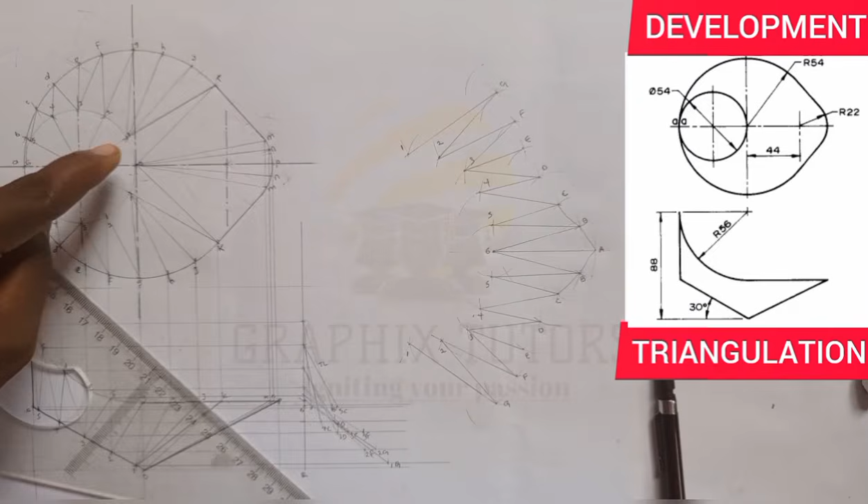So we need 1 to H. So 1 to H will be from this point to this point, and I'll place it on that line of 1. This is 1, I'll mark it here. So this is my 1H here. 1H, right? So from this point, 1H.

You know H is also on this line, so look at H2 on that same point. I'll come from 1 to H at this point. Then 1 to H at this point. So this is my point what? My point H, and what? My point H.

So let's join them together, faint line. You can see that. Then the next one that we have in here, from that same point 1 to H, you still want to what? 1 to J. So for me to get point J, I'll come here, measure H to J.

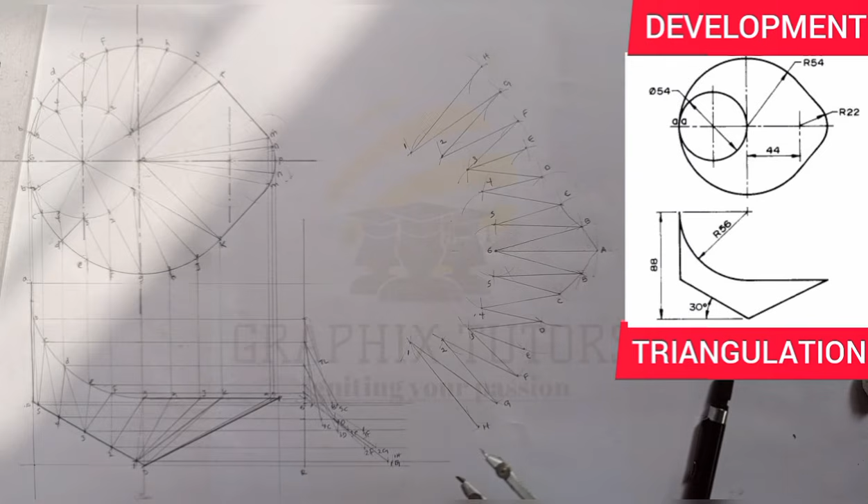I'll come here also, I'll measure H to J. And also H to J. Right? Now we will need 1 to what? 1 to J. So this is 1 to J. So from here, if I place it here, 1 to J, at this manner, I'll come to this point.

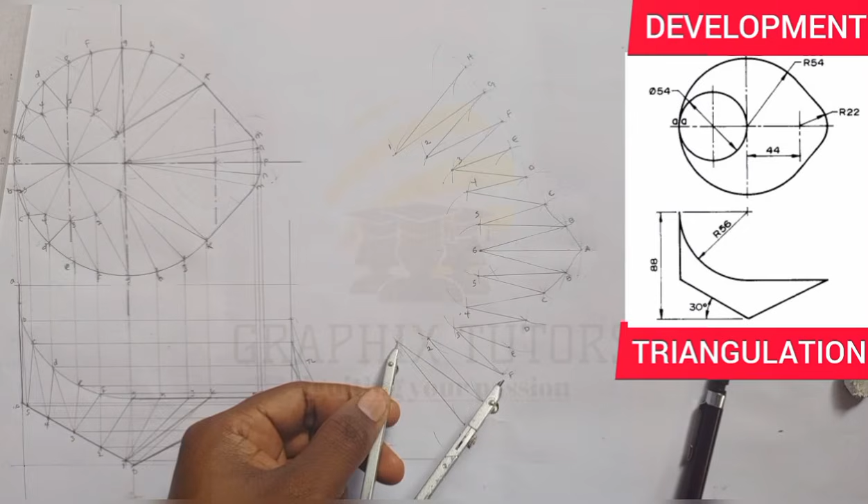This is 1. Then I'm going to mark. J will be somewhere around here. So the true length will be from this point to the line, this same line of G here, of J. So when I place it at 1 here, I'll get this. That will be my point J. When I place it at 1 here, I'll get my point J. So this point you're seeing here, this is the point J, and this is what? The point J.

Right? So I can easily join these 2 points here, from here to here, and from here to here. You can see that. Similarly, we have J to K, because the same one is connected to K. So I need from J to K, J to K. Now place it at this point, J to K around here, and also J to K around here.

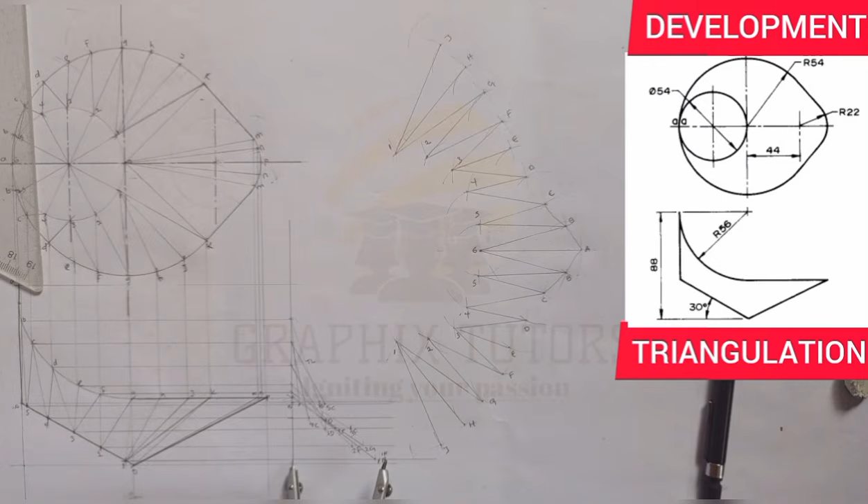So we have 1 to K. Is that taken? So if I should come here on that same line of 1 and mark here to get point 1K, 1 to K here. And hold together because K is still on the same line. So I place it on 1 in order to get my K. This is my K at this point. K here and also K here.

So I have to clean all this so that it will extend to this point. Is that taken? So I'll just join this to this point, 1 to K and 1 to K.

Similarly, we're having the next point to be M. Is that taken? From K to M, K to M. Because I need O first, so I'll come from 1 to O.

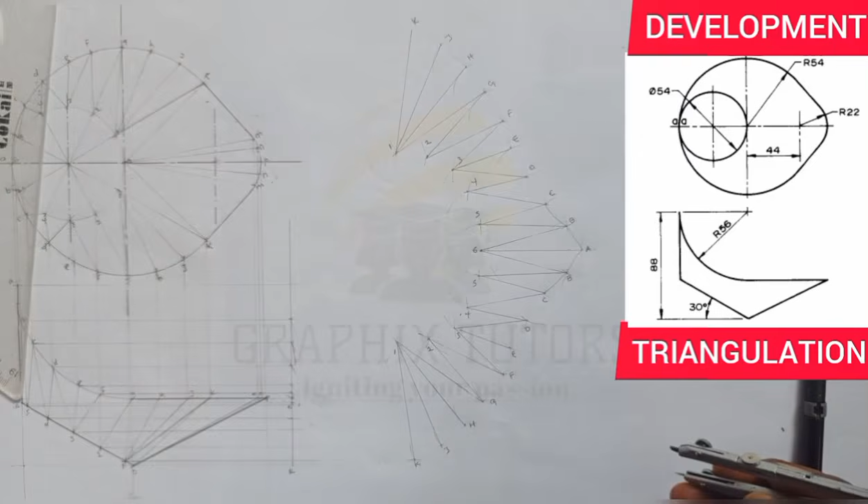I'll come to this point and strike an arc to get point O. I'll come here also and strike another arc to get point O. We need K to O, from here K to O, and I'll place it at this point. From this reference point is O. If I mark here on this line of K, this is the line of O and K. So this is K here.

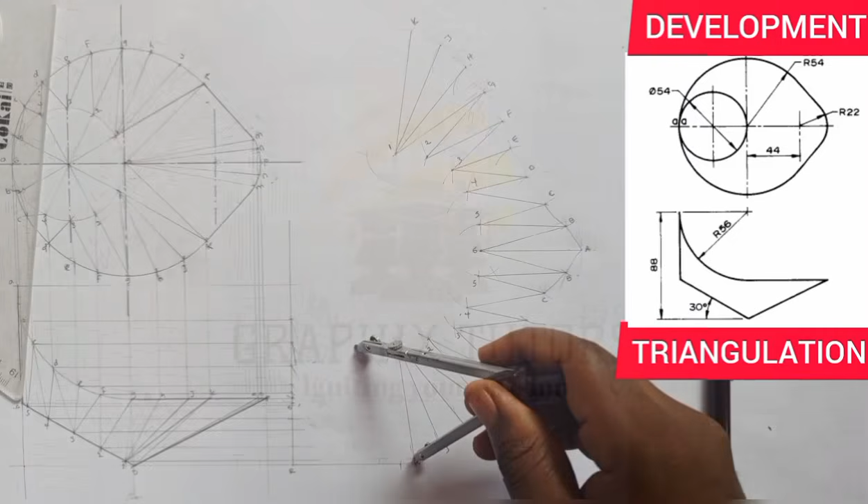I'll take it to that line of K here. Since K is still on the same line, the reference point, I'll place it on K to get my O, and again on K to get my O. This point you're seeing here is point O, and this point here is also point O. I'll join it together from here to here, and from here to here. Can you see that? That is my point O.

Now the next thing is from K to M. I come from here, K to M. I'll come to this point K and strike an arc to get my M at this point. I'll come to this point K again and strike here to get my point at this point here. Let me bring it down a little bit, so my M will be on this point.

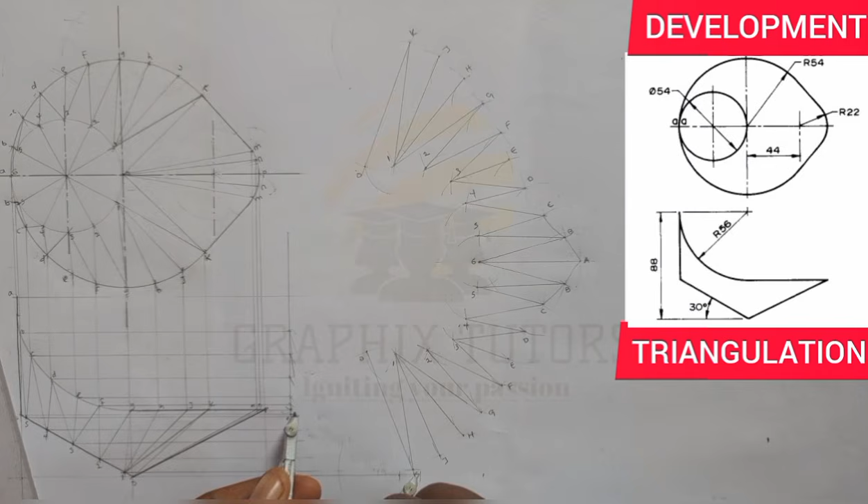So we know that's O to M. I'll come to this point from O and strike an arc here to be on this point here. So on this line, I'll place it on that point and take it to M. Can you see that straight line? So I come from O to M, place at O, strike an arc, and this point here where it meets is my point M.

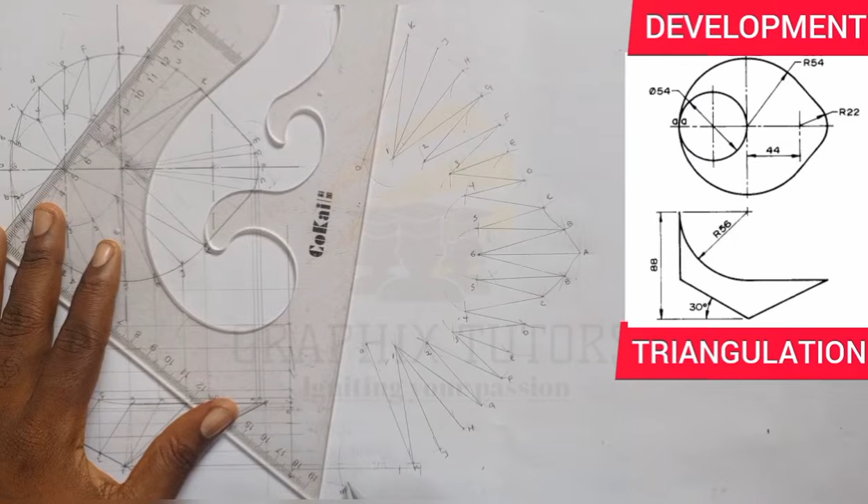So I come again from O to M. This point where it meets here is my point M. Let me just bring it down a little bit, with my point M. This is my point M here. I'll join them together, O to M, then O to M. Now we'll notice one thing.

K to M is a straight line because it's tangential, so I can easily use my straight line and connect it together that way. Let me just use a straight line to connect both of them, K to M, taking it because it is tangential, the straight line. And here also. Can you see that? So we'll proceed from there.

Then the next one, we have M to N, very small for M to N here. I'll come here also and mark M to N, just strike an arc this way. I'll come here also, M to N, and strike another arc here.

So we have O to N. Again, from this point here I'll mark. On that line, when it meets, just like we've been doing before, you place it there and trace it to the point of N here. And you come to O and strike an arc where it cuts, and strike another arc there where it cuts. So this point here is my N, and here also this is my N. Start taking it, and I'll just connect both of them, but we'll proceed first.

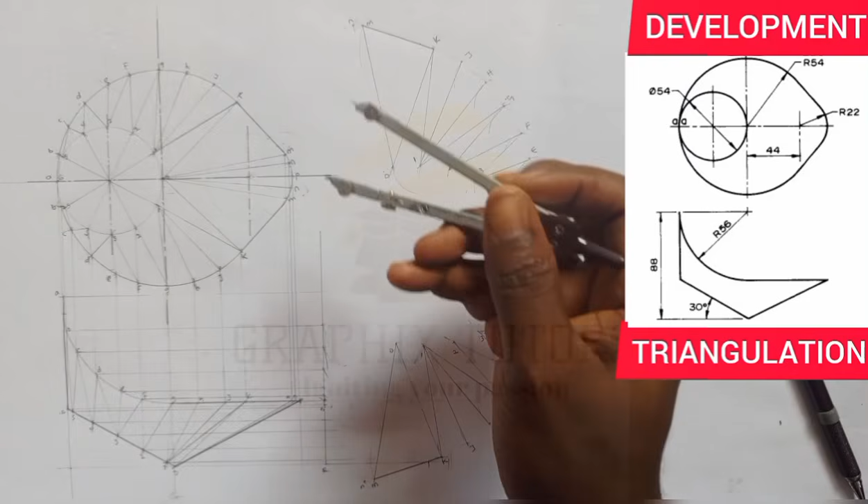Then we have N to P. So from N to P, I'll place that N to get my point P, and again place that N to get my point P. So we'll move from O to P, the straight line. I'll come on this point O here and mark, so that I can get my point P to this point here. If I place it at O, I'll strike an arc here, place it at O again, strike another arc here. So where they meet will be my P, and here also is my P.

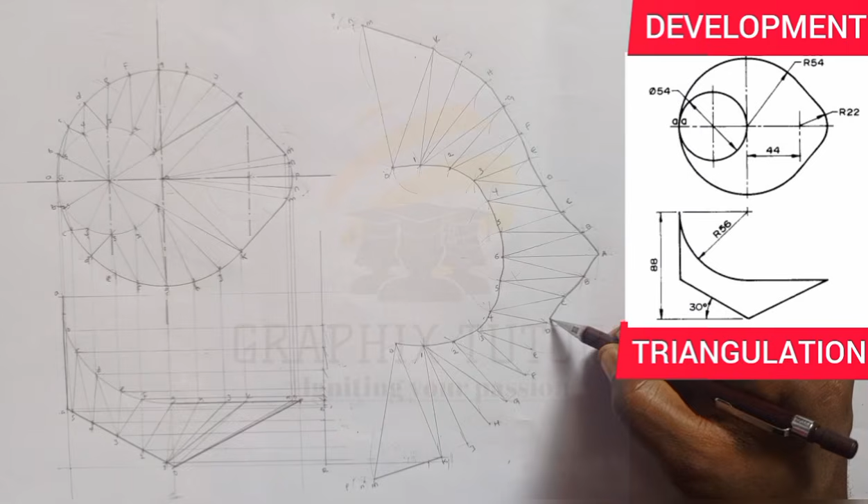So these are all the points I'm going to join together using my French curve. You just join them with your French curve from this point, joining here to here, and on this one you join as well. Can you see? And you also join all these points together with your French curve. And you're taking this and closing it up, and taking this and closing it up all together. So this is the development of this thing you're seeing here.